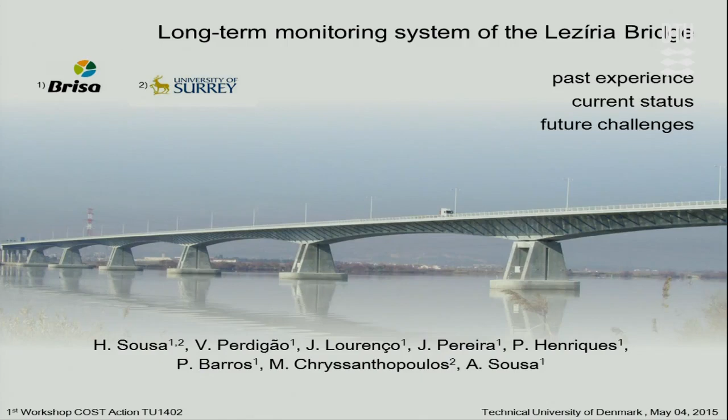My name is Helder Sousa, and I came here today mainly to share a perspective of a bridge owner about the long-term monitoring system employed in one of the longest bridges in Europe, the Lezíria Bridge. I came here also to focus mainly on the past experience, current status, and future challenges related to this monitoring system.

This presentation is organized as follows. I will present BRISA, who is BRISA, then present the long-term monitoring system of the bridge, then present the actual performance after 9 years of operation, and finally the steps towards more efficient management of the Lezíria Bridge based on this monitoring system. I conclude with the main conclusions.

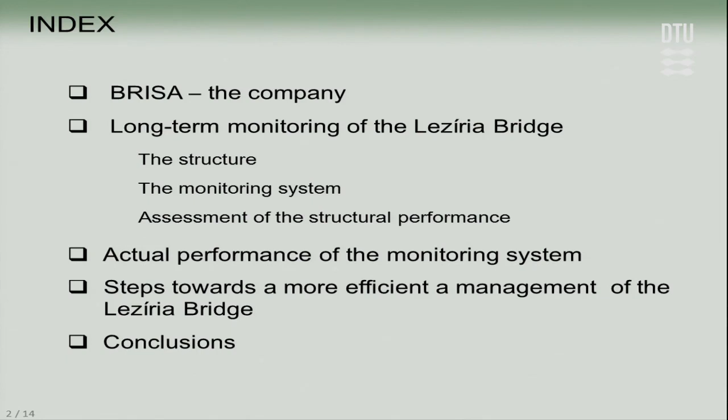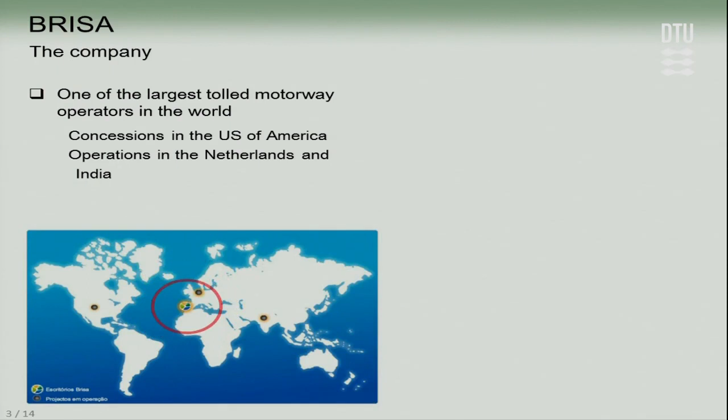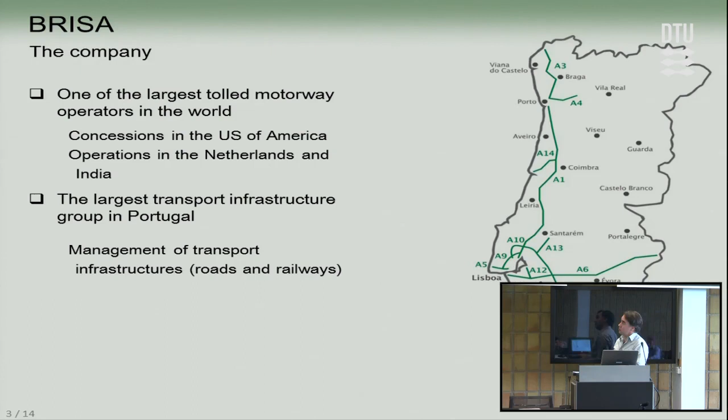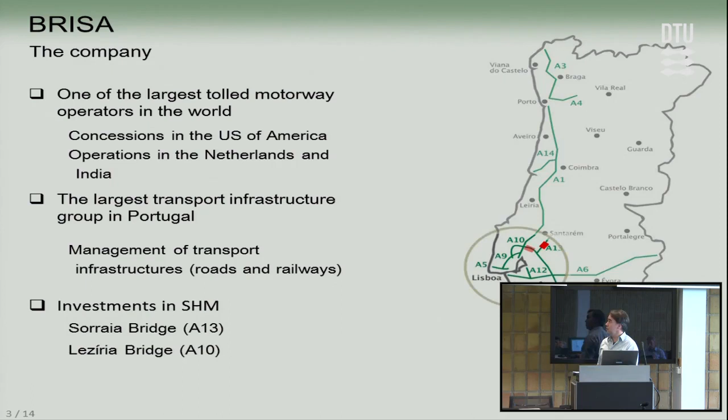Who is BRISA? BRISA is the major highway agency in Portugal and one of the largest toll motorway operators in the world, with concessions in the United States and operations in Netherlands and India. It is also the largest transport infrastructure group in Portugal, mainly focusing on asset management of roads and railways, with relevant investments in SHM, mainly in two bridges, including the Lezíria Bridge, which is near the capital, Lisbon.

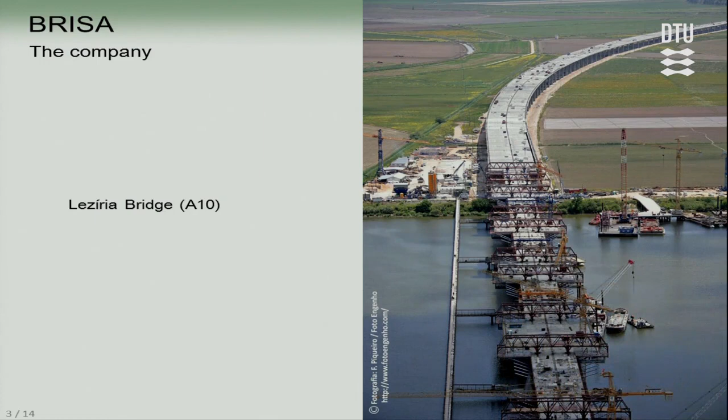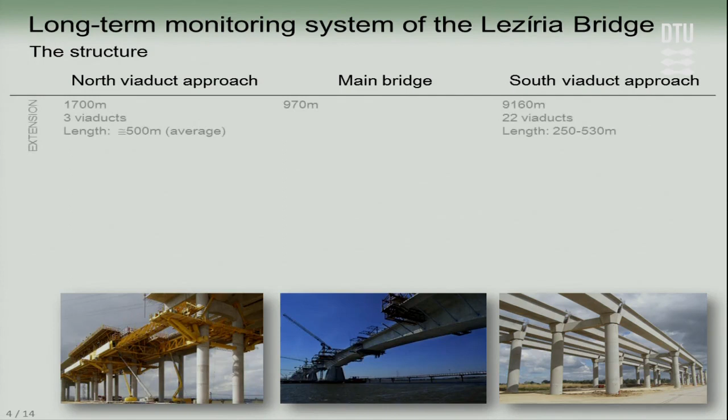The main focus of this presentation is Lezíria Bridge. As I said, it's one of the longest bridges in Europe, and there are a lot of sensors on this bridge. Briefly, the structure is composed of three main substructures: the approach viaduct and the main bridge. The longest structure is the south viaduct with almost more than 9 kilometers.

The solutions are quite different. The main bridge is a cantilever bridge, and the south viaduct is a partial precast solution. The foundations are very similar, but as I said, the construction processes were quite different for each one.

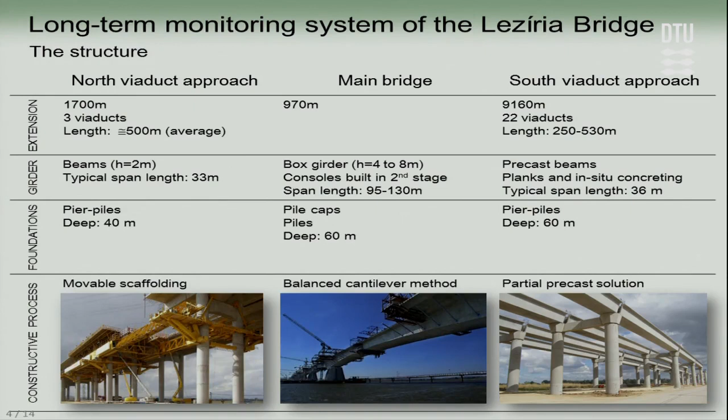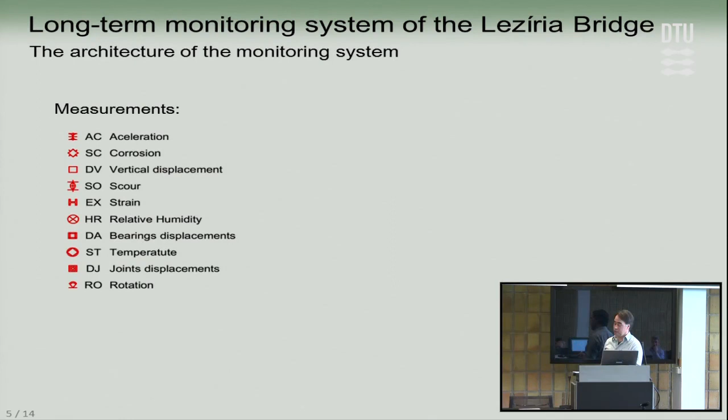Now, regarding the monitoring system, briefly, there are a lot of parameters being measured, which are represented here. I will try to show you how this is implemented from a bridge owner perspective.

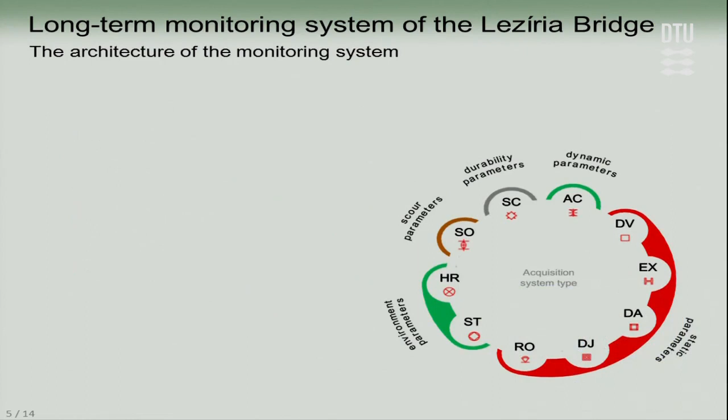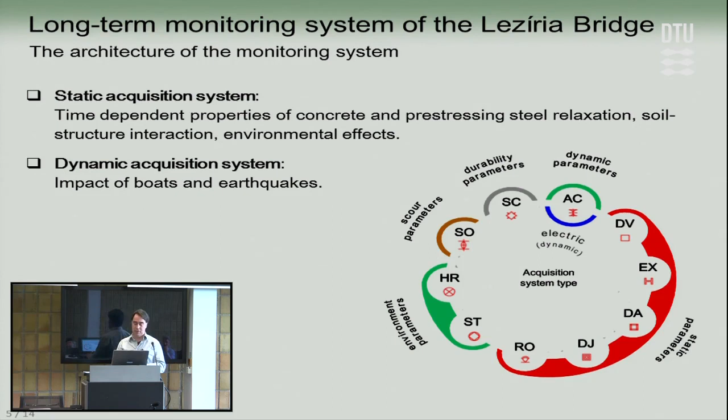If we focus on the sensorial system, the measurements, we have different subsystems. We have a static acquisition system devoted to the long-term performance of the bridge, and then complementary subsystems, a dynamic one and an optical one, to complement the information collected by the static acquisition system.

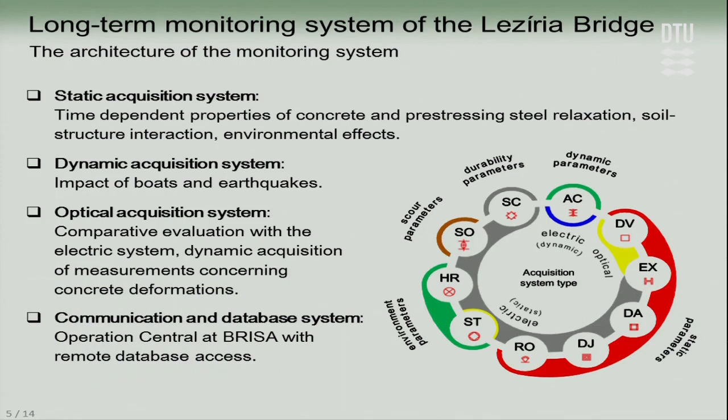Finally, all this information is collected, centralized in an acquisition node in the bridge, and sent to the database hosted at BRISA.

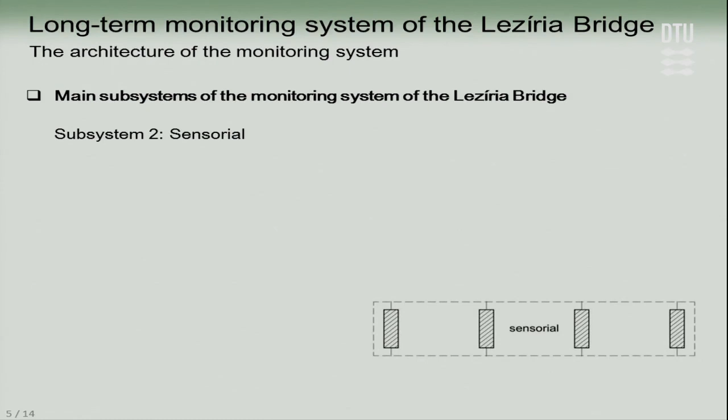But from a bridge owner perspective, it's also important to contextualize what this sensorial subsystem is and how it is integrated. So what I presented before is the sensorial subsystem, all sensors installed there. But in fact, we have more subsystems, which is below the power supply.

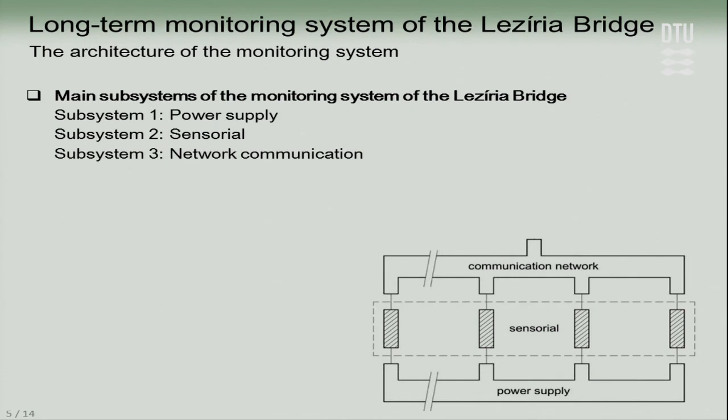Above, you have the network communication, and finally the database and data processing. This architecture is very important from a bridge owner perspective, because if there are problems related to one of these subsystems, it's easier to identify the expertise necessary to solve those problems.

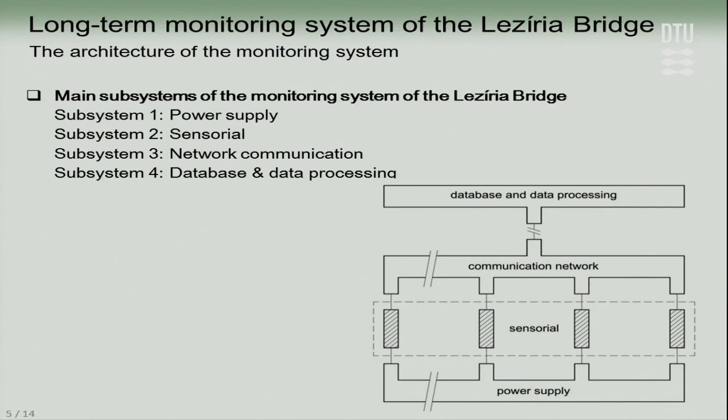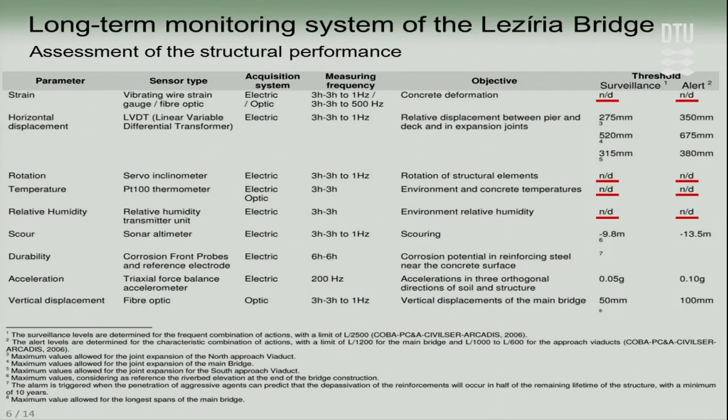Now, regarding the assessment of the bridge based on these collected measurements, we have all these parameters. I describe here the sensor type, the acquisition systems used, the measuring frequency, and the purpose of each measurement. Mainly these measurements are compared with thresholds previously defined by the bridge designer. Nevertheless, some parameters were not defined yet, mainly strain gauges, because it was decided necessary to follow the first years of the bridge to define those thresholds.

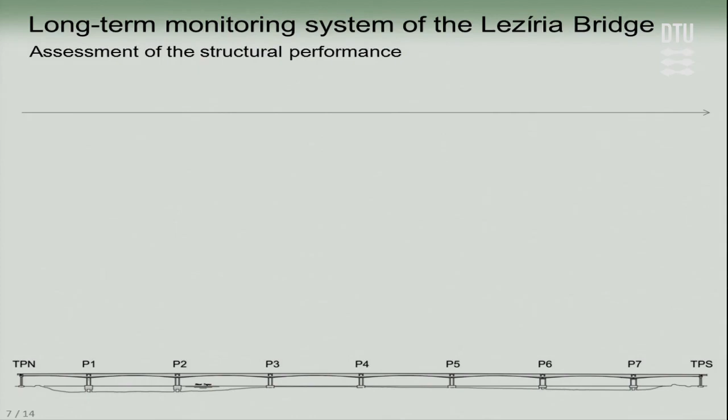So for this, it was developed under my PhD, a refined finite element model for the bridge. I will present mainly the main bridge results, not the entire analysis, and show you the main results that were collected.

These are measurements during construction. This is a strain gauge located in the top layer of this section of the pier. Overlapped here are the numerical results, which match very well with what was observed.

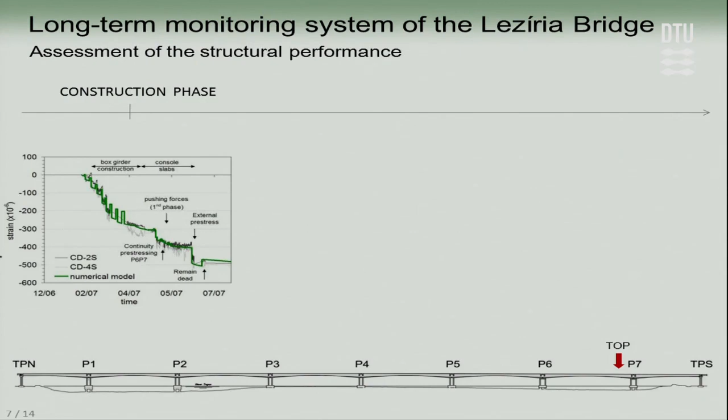In addition, after that, for the loading test, it was excellent to calibrate - not calibrate, because the model wasn't calibrated. What we did was implement in the model the real material properties, the time history, the environment conditions, and also shrinkage and creep properties measured in specific specimens.

What I want to show here is that the curvatures of these sections, which are quite difficult to match, were very well predicted by the numerical model.

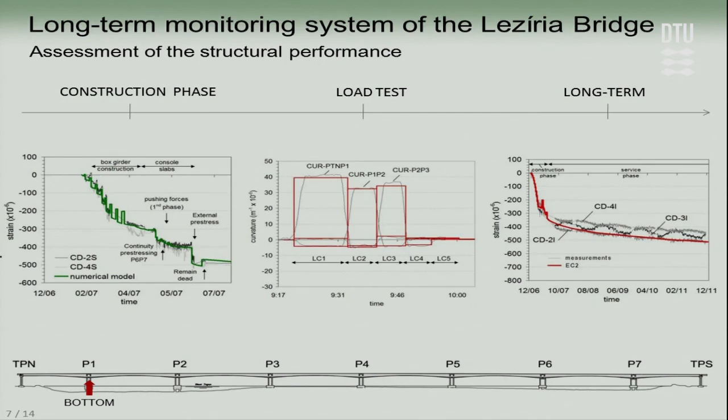Finally, if we enlarge this window even more, this graph is an extension of the previous one, but now for the following years. The challenge here is to predict these trends, mainly due to shrinkage and creep effects. Here the results match very well, but there are cases where this was not so straightforward.

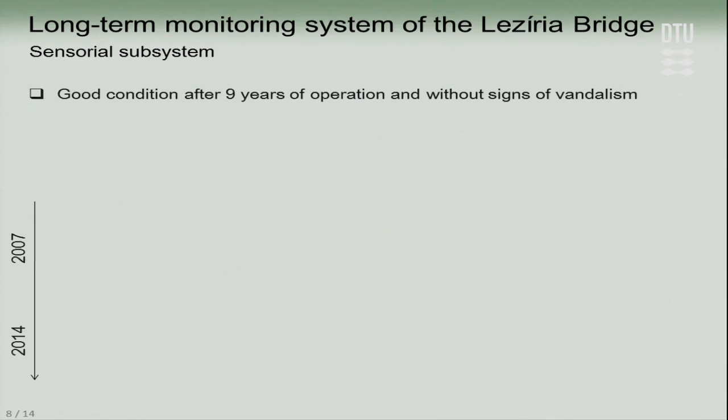Regarding the condition of the system after 9 years—this kind of information is scarce in the literature—I want to share that after 9 years of operation, the system is in very good condition and without signs of vandalism. Here are pictures collected in 2007 and pictures collected last year, and you can see the condition of the system is very good.

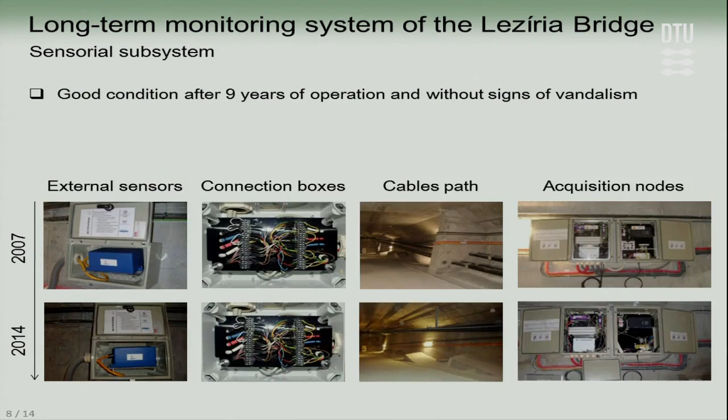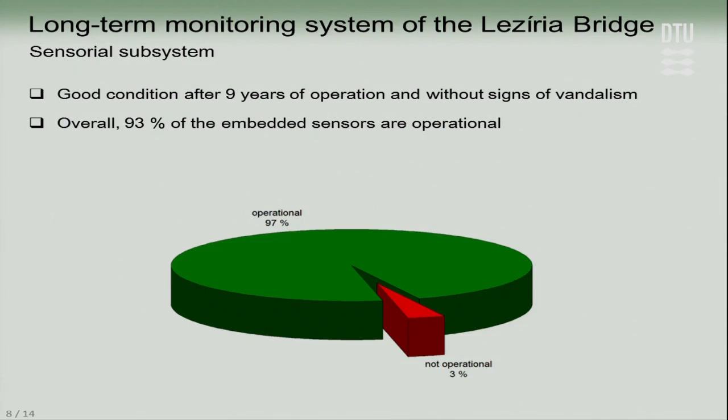Regarding the function of the embedded sensors, this is also something we don't find too much in the literature: after 9 years of operation, we have 93% of them operational. We are aiming for 97% performance, because some sensors aren't working, mainly due to the fiber optic sensors using a serial scheme—if one fails, the remaining ones in that chain cannot be reached. So this will be recovered.

Regarding the quality of the collected measurements—because we cannot do analysis if we don't trust the measurements—based on these 9 years, the most reliable measurements in this system are the vibrating wire strain gauges, the thermometers, and the fiber optic sensors. They show very stable and reliable measurements over a long time.

Regarding external sensors, we have some problems in terms of maintenance because they are exposed to degradation, mainly the sonar altimeters in the river, due to the hard conditions they are exposed to.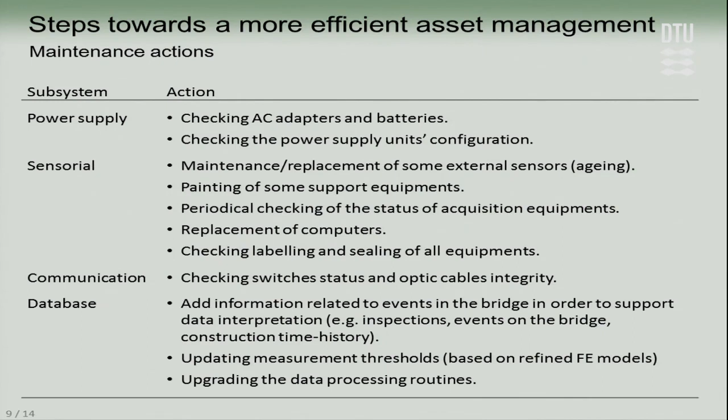From the bridge owner perspective, definitely these kinds of systems need some maintenance. As I said, describing the subsystems before, there are maintenance actions required for each one, and bridge owners need to be aware that installing a system doesn't mean it will just work without being bothered with it. No, we need—and mainly it's necessary—to continuously update the data processing routines. For a long-term system, advances in science and technology are fundamental.

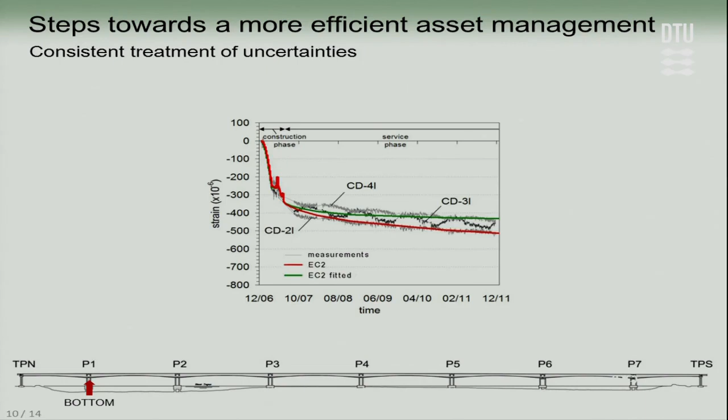Now, from a research perspective, I present again that result shown previously. I see here trends predicted very well with the measurements, but there are challenges to be faced, because depending on the models used for shrinkage and creep, these trends might change significantly. If you're talking about 5 years but want to predict 100 years, these trends will produce different thresholds.

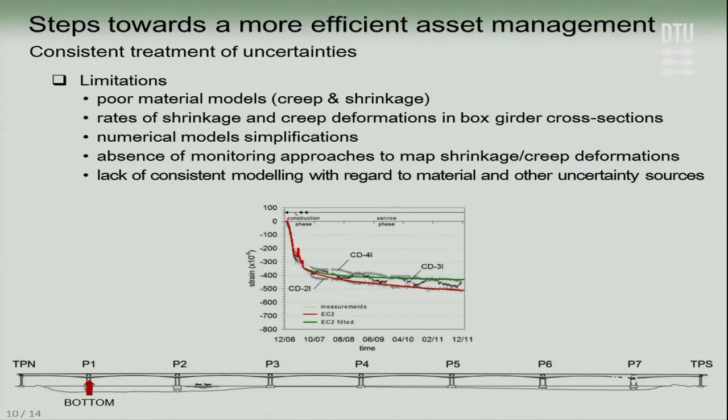This is mainly due to poor material models for creep and shrinkage. There is no agreement on which one is better, and even the values they give differ—there are different rates of shrinkage and creep depending on the element thickness. This changes a lot. Numerical model simplifications always exist, and also there's an absence of monitoring approaches able to map shrinkage and creep deformation. A strain gauge measures a punctual deformation, but for analyzing this problem properly, we need something able to map instead of just a punctual measurement.

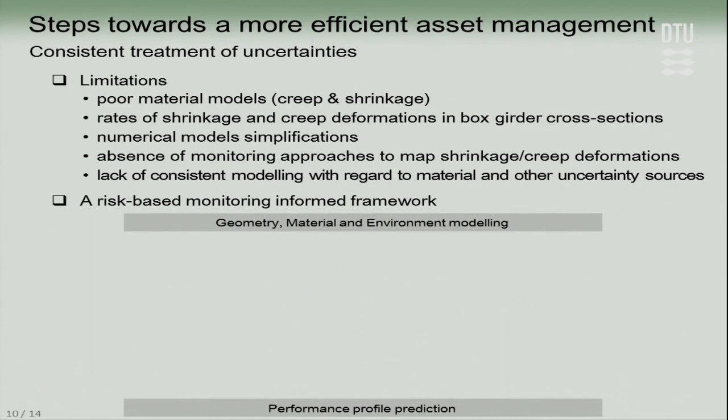Finally, concluding: recently we won a European project with Brisa and the University of Surrey, and we want to bring together two worlds that don't communicate too much—structural modeling and reliability modeling—benefiting from monitoring data, as this case study is able to give.

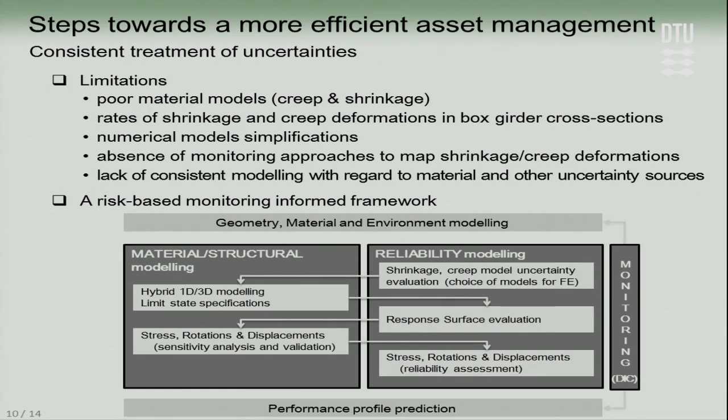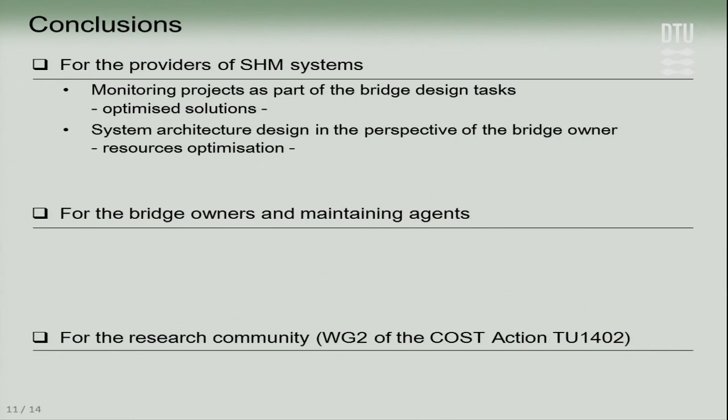As conclusions, I have three main messages. One for providers of SHM systems: monitoring projects as part of the bridge design tasks lead to optimized solutions. The system architecture design, from the bridge owner's perspective, is very important, so it leads to resource optimization. And monitoring systems are complex, like this example.

For bridge owners, I would say their feedback and satisfaction is vital to succeed in implementing these kinds of systems. Also, systems like this one, expected to work for the lifetime of the bridge, require maintenance that is also very important. Finally, as a contribution for working group 2: the integration of physical and mechanical models with probability models, benefiting from SHM, to support asset management throughout the operation lifetime—mainly creep and shrinkage indicators based on point and section strain profiles.

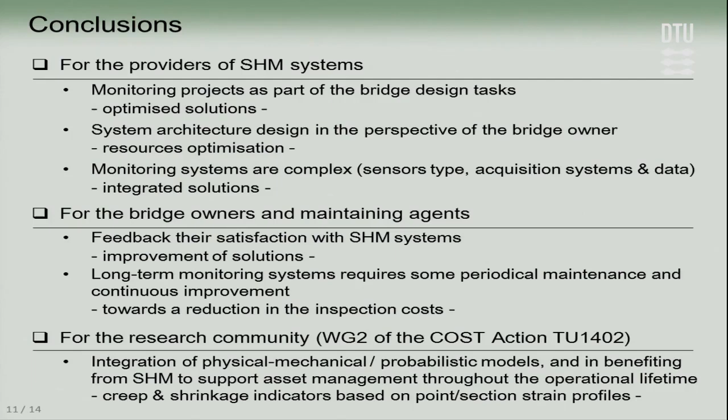Thank you very much. If you want to find additional information about this work, there are a lot of publications available. Thank you very much.